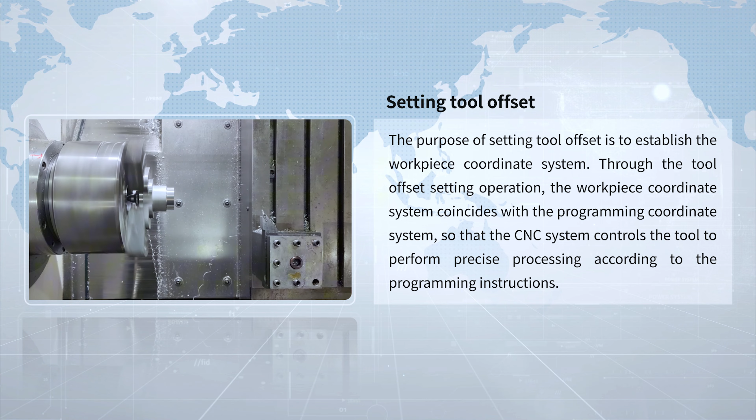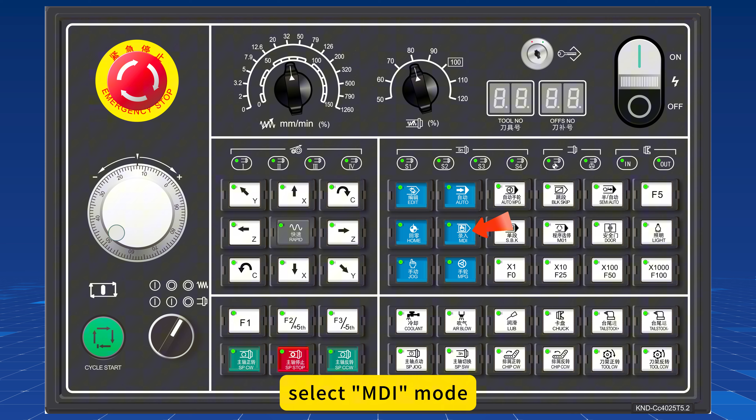Let's take tool number 1 as an example to demonstrate the steps for setting tool offset. Press the POS key to enter the position page. Select MDI mode. T0101. Select tool number 1 and tool offset number 1, and then start the spindle forward rotation.

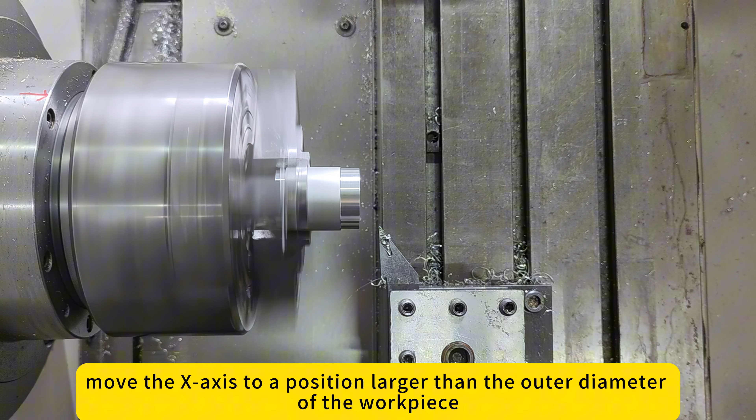Select MPG mode. Move the X-axis to a position larger than the outer diameter of the workpiece, and move the Z-axis to an appropriate position near the end face. Move the X-axis so that the tool cuts the end face of the workpiece along the diameter direction of the workpiece. After the cutting is completed, keep the Z-axis stationary, and retract the tool in the opposite direction of X-axis

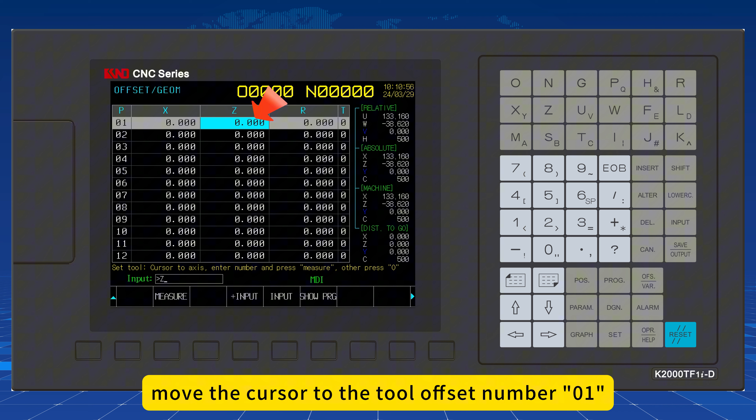away from the workpiece. After the tool is far away from the workpiece, press the OFS key to enter the OFFSET/GEOM page. Move the cursor to the tool offset number 01. Key in Z0, then press the measure confirm key. Tool offset setting in the Z-axis direction is completed.

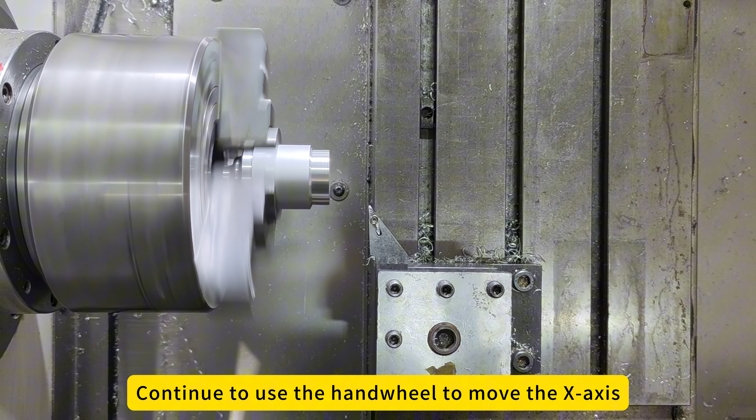Continue to use the hand wheel to move the X-axis to an appropriate position near the outer diameter of the workpiece, and then move the Z-axis so that the tool cuts about 5 mm along the axial direction of the workpiece. After the cutting is completed, keep the X-axis stationary and retract the Z-axis in the opposite direction to a safe position. Then stop the spindle rotation.

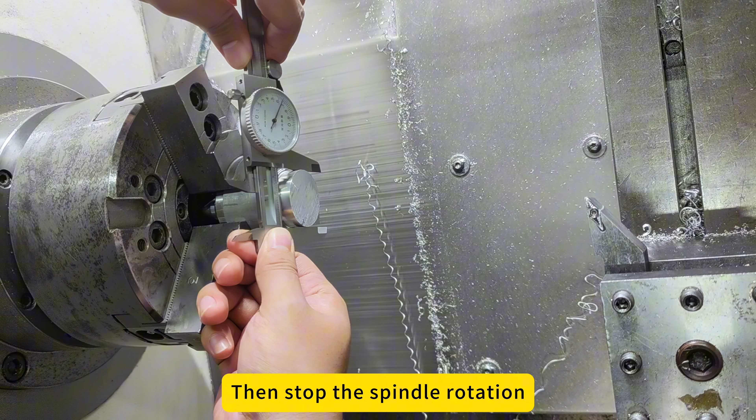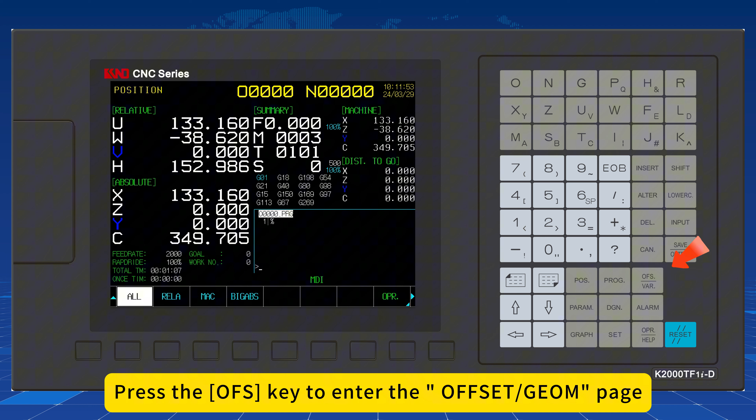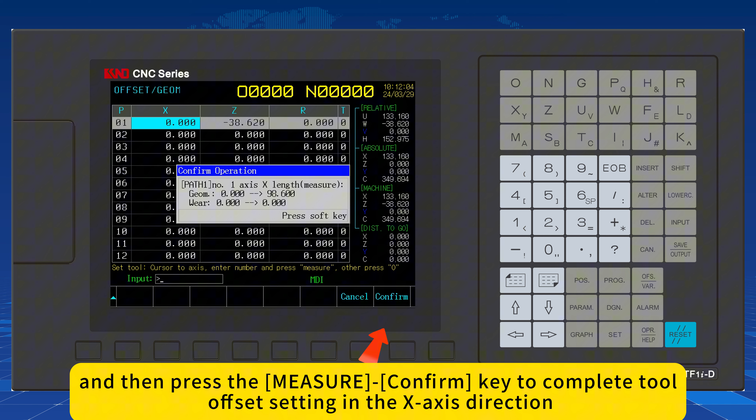Use a vernier caliper to measure the diameter of the cut part of the workpiece, which is 34.5 millimeters, and record it. Press the OFS key to enter the OFFSET/GEOM page, key in X34.5 in the tool offset number 01, and then press the measure confirm key to complete tool offset setting in the X-axis direction.

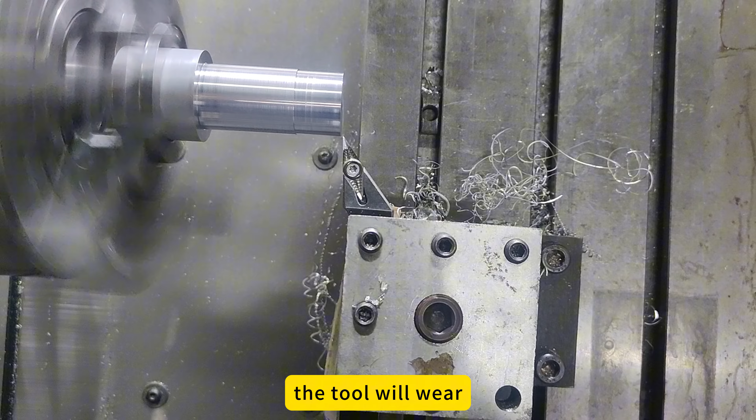When the tool is used for a period of time, the tool will wear, thus affecting the machining accuracy of the product. At this time, you can input the correct tool wear value on the offset or wear page to compensate for the machining error caused by tool wear.

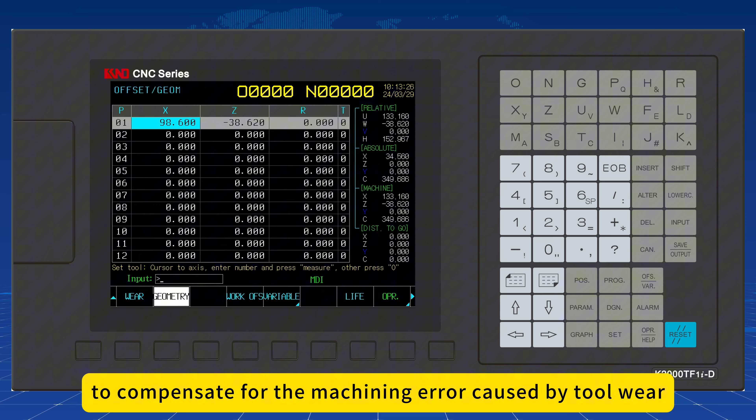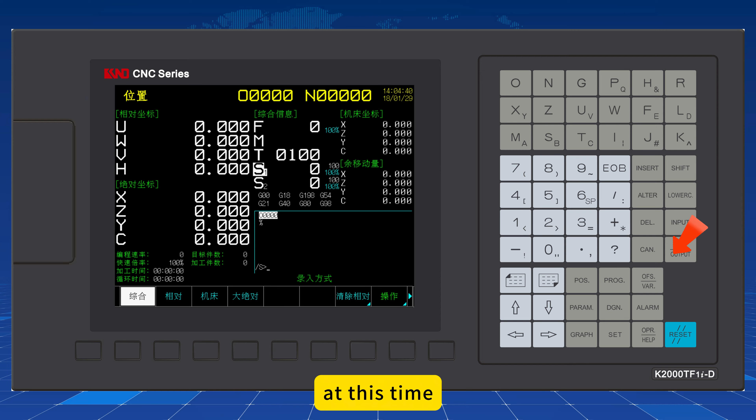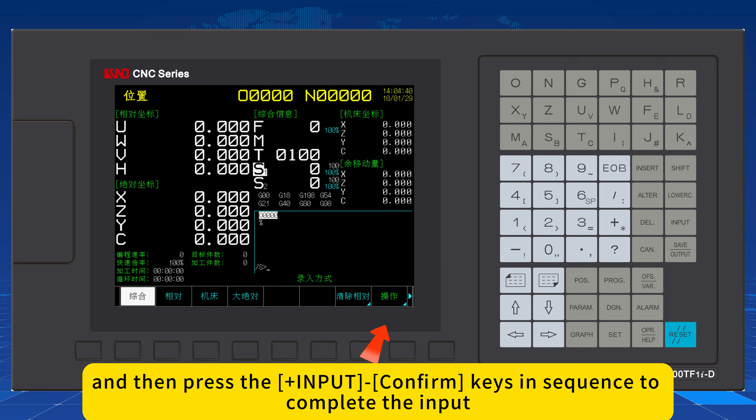For example, when performing cylindrical machining, if the actual diameter of the finished workpiece is 0.02 millimeter larger than the diameter specified by the program, press the OFS wear keys in sequence to find the corresponding tool wear number. Assuming tool wear 01, key in X-0.02, and then press the plus input and confirm keys in sequence to complete the input. Then run the machining program again. The machining error will be compensated.

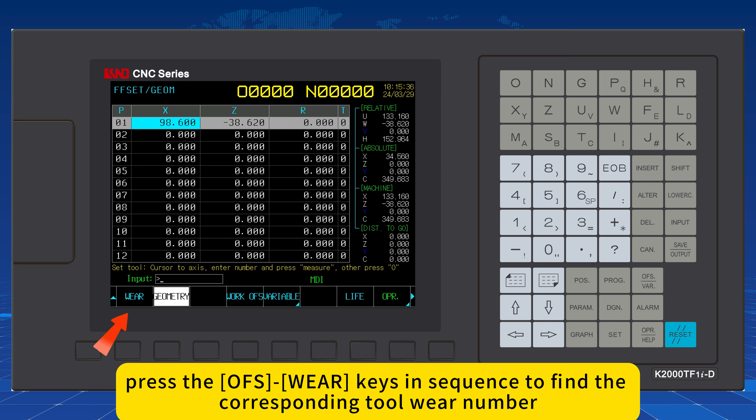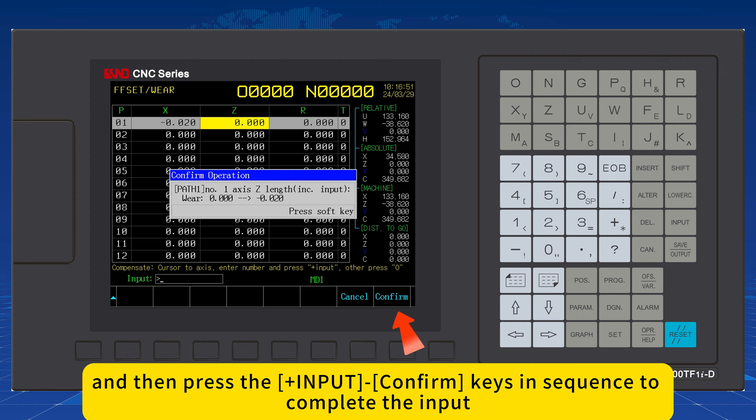When performing end face machining, if the Z direction size of the finished work is 0.02 millimeter larger than the size specified by the program, press the OFS wear keys in sequence to find the corresponding tool wear number. Assuming tool wear number 01, key in Z-0.02, and then press the plus input and confirm keys in sequence to complete the input. Then start the machining program again. The machining error will be compensated.

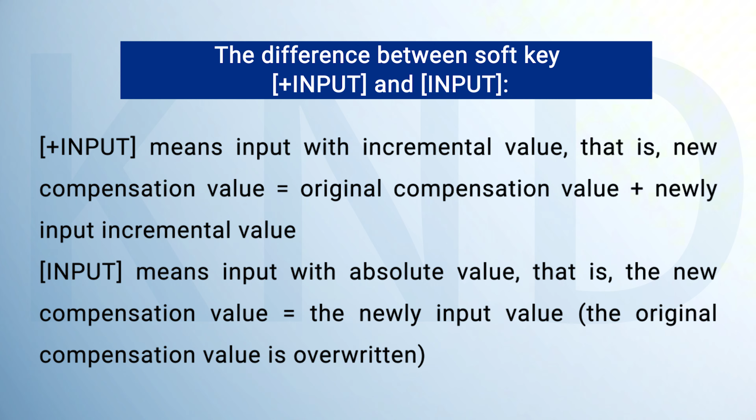Here you need to pay attention to the difference between soft key plus input and input. Plus input means input with incremental value. That is, new compensation value equals original compensation value plus newly input incremental value. Input means input with absolute value. That is, the new compensation value equals the newly input value. The original compensation value is overwritten.

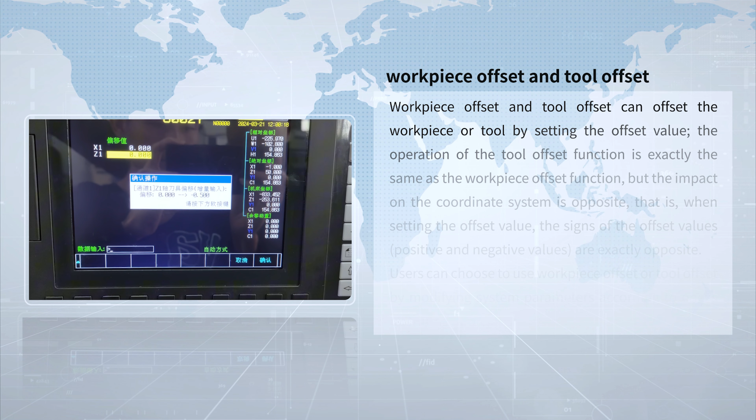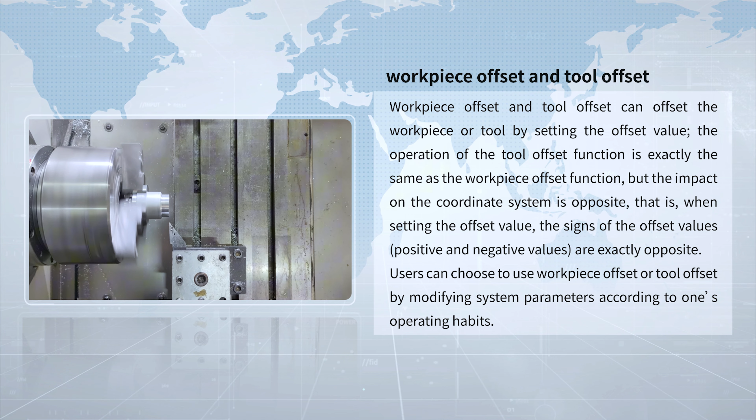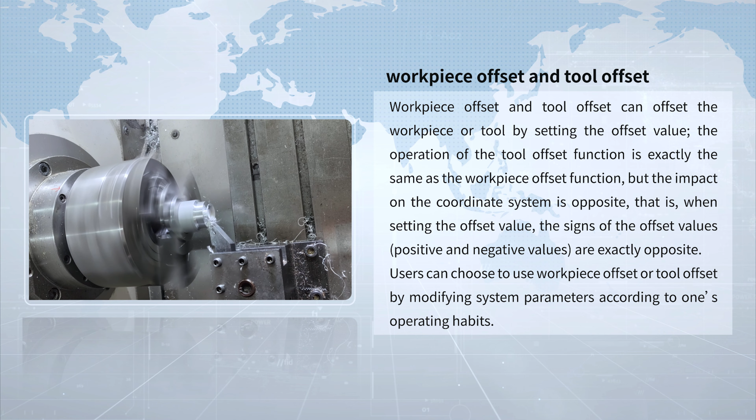Workpiece offset and tool offset can offset the workpiece or tool by setting the offset value. The operation of the tool offset function is exactly the same as the workpiece offset function, but the impact on the coordinate system is opposite. That is, when setting the offset value, the signs of the offset values are exactly opposite. Users can choose to use workpiece offset or tool offset by modifying system parameters according to their operating habits. Let's take tool offset as an example to explain how to use it.

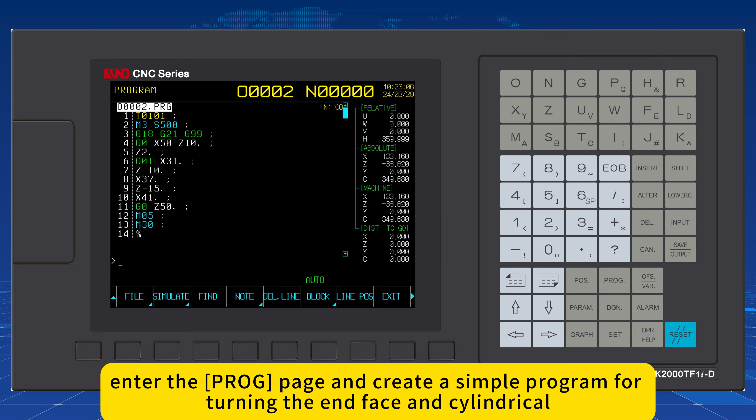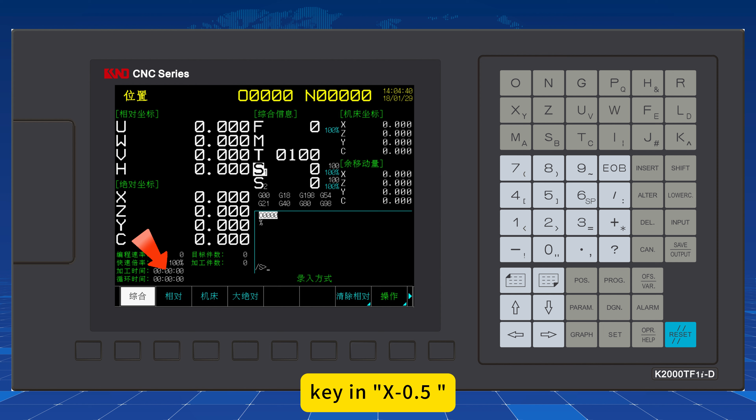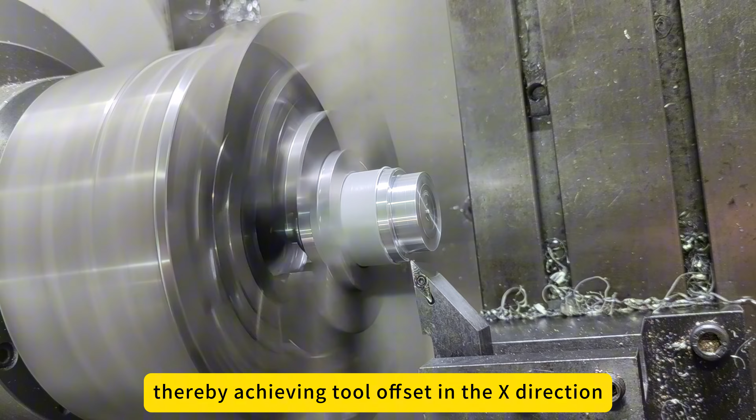After the tool offset setting is completed, enter the PROG page and create a simple program for turning the end face and cylinder. Run the machining program. When the machining is completed, enter the OFS tool OFS page, key in X-0.5, press the plus input key. At this time, the absolute coordinate of X will increase 0.5 millimeter. When the machining program is run again, the outer diameter of the workpiece is reduced by 0.5 millimeter, thereby achieving tool offset in the X direction.

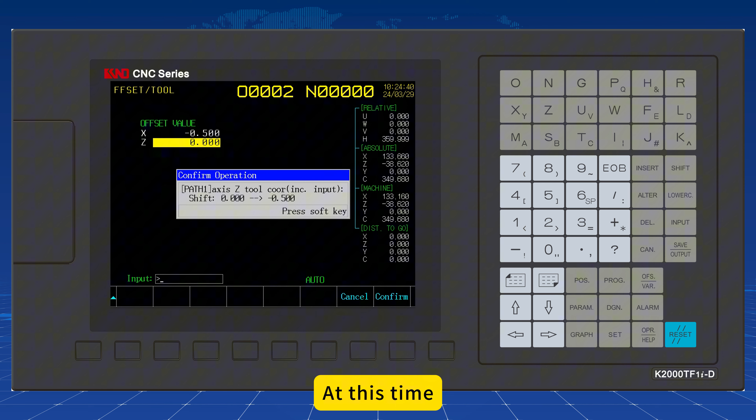Enter the OFS tool OFS page, key in Z-0.5 and press the plus input key. At this time, the absolute coordinate of Z will increase by 0.5. When the machining program is run again, the Z direction size of the workpiece is reduced by 0.5 mm, thus achieving tool offset in the Z direction. This operation is suitable for one-time clamping and continuous processing of multiple workpieces.